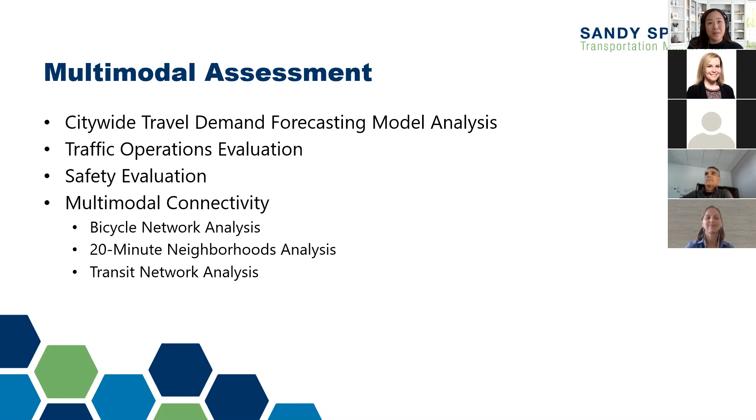I'm not going to give too many details and spoilers here since Jordan's going to walk you through some of that. So with that, Jordan, I'm going to pass the baton off to you. Could you share a little bit more about what we did? Sure. Next slide, please.

The first effort we are going to discuss from the multimodal analysis was our travel demand forecasting model, which is basically a tool that we use to better understand existing travel patterns in the city and how those patterns, and subsequently how traffic volumes, are likely to change in the future. That's based on a variety of things, including socioeconomic data and infrastructure projects.

For example, if we have a new roadway project or even a roadway widening type of project, if there are areas of the city where we anticipate a lot more jobs going in or areas where we anticipate a lot more housing going in, then all of those things influence where trips in Sandy Springs begin and end and how motorists or travelers route between those origins and destinations.

Then using that calibrated 2018 model that's refined to the city, we built a 2050 model. It keeps all of our calibration edits, and then it applies all of those planned roadway infrastructure projects that are planned for the future, as well as socioeconomic data projections from the region.

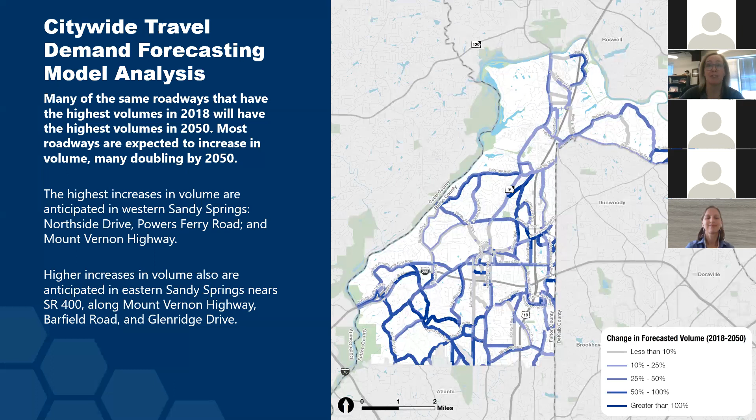And then there are areas of Eastern Sandy Springs with the highest increases in traffic volumes being those areas around State Road 400. That includes Mount Vernon Highway, Barfield Road, and Glenridge Drive. Next slide, please.

Looking at volumes from the model alone isn't a totally fair way to analyze traffic along the roadway network, since several roadways are higher volume because they're designed to carry more traffic volumes. That's why we look at volume to capacity ratio. We can get an idea of traffic congestion and quality of service by comparing a roadway's actual traffic volume to the volume to which it was designed to carry.

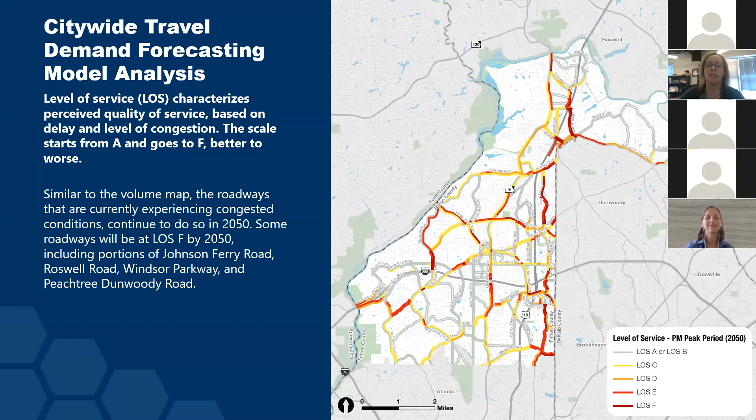But also related to the increased capacity on I-285, some areas of the city, like Hammond Drive, are seeing some improvements. Next slide, please.

Our next effort was our traffic operations evaluation. What's pretty common when doing a citywide transportation plan is it can be difficult to get very detailed and operational information for all of our city intersections, just because there's so many. So what we did as part of this effort was do a...

From here, we were able to do that type of analysis for 2018, and then we did it again for 2050 as well. We wanted to look at existing conditions as well as what's projected for the future, just to see what types of both short-term and long-term needs we need to address.

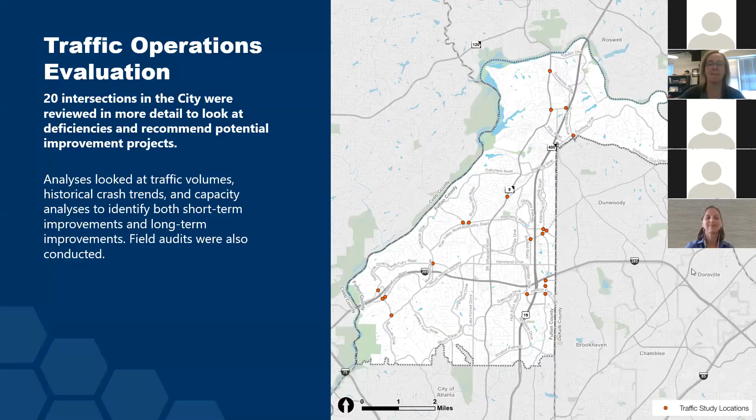Based on those needs identified at each of the intersections, we were able to make several improvement recommendations, such as repaving and restriping, improving signal equipment like adding backplates with retroreflective borders to signal heads, or upgrading left turn signal heads to flashing yellow arrows. We also identified other safety operational improvements, like raised pavement markers, retroreflective median nose delineators, those sorts of things.

We're in a position right now where the city has completed a lot of large roadway and intersection improvement projects pretty recently. So a lot of the recommendations that came out of this particular analysis can seem more modest in comparison, but really a lot of these are lower cost, lower effort projects that actually have a pretty high impact on traffic safety and operations.

This was a cool tool that allowed us to use the Transportation Master Plan as a way to address some more immediate needs for the city. So while some of the larger projects didn't come from this analysis, it was a really good effort to be able to jump in and look at some intersections in more detail.

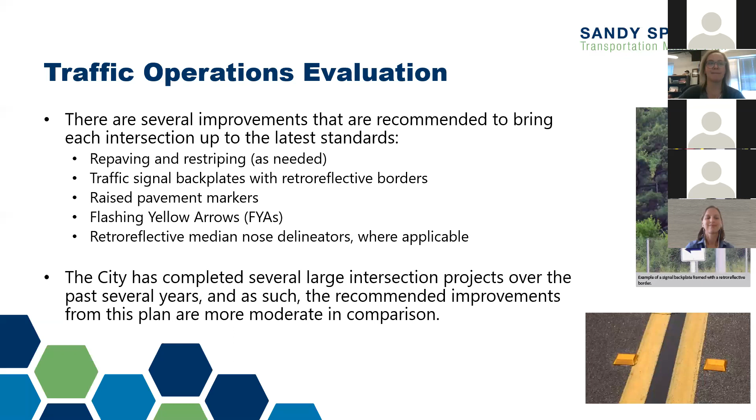Our next task was the safety evaluation, which Jessica mentioned before, was really two tasks. The first was looking at the city as a whole, but then, similar to our traffic operations evaluation, we also did more in-depth safety studies at five high crash intersections within the city.

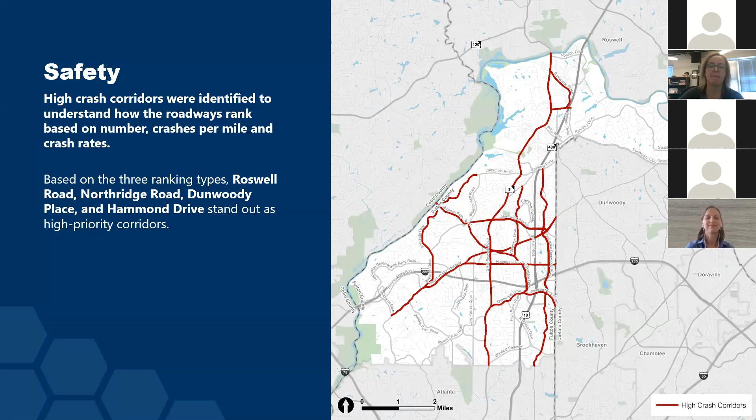Based on these three metrics, we identified Roswell Road, Northridge Road, Dunwoody Place, and Hammond Drive as high need corridors.

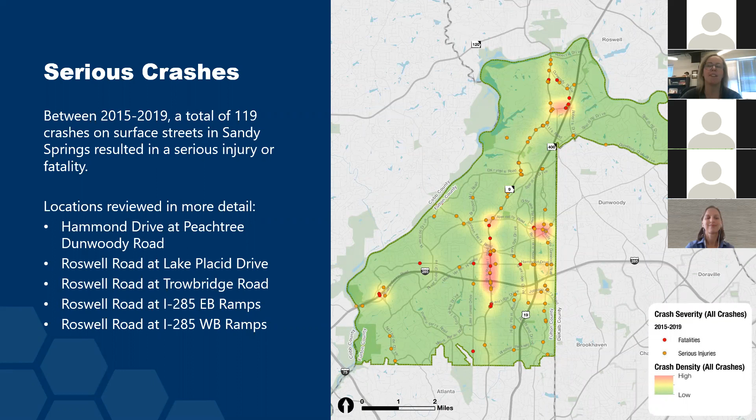As part of our citywide safety evaluation, we analyzed the city's crash history to identify emphasis areas defined from the state of Georgia's Strategic Highway Safety Plan. An emphasis area is a way that helps us identify the top factors contributing to crashes in Georgia. This allows us to develop countermeasures and comprehensive safety recommendations with corresponding programs to achieve crash reductions for the types of crashes actually happening in our community.

Identifying these emphasis areas allows us to focus our efforts on emerging safety trends and identify what's appropriate to treat them. So the top 5 emphasis areas that emerged from our analysis, listed in order for Sandy Springs, are intersection-related crashes, distracted driving.

Our next slide dives a little bit into bicycling and walking. For the bicycling and walking assessment, we looked at the existing city transportation network and tried to understand where there were gaps in the network. Another part of this analysis was to really look at the suitability of Sandy Springs streets for cyclists and pedestrians.

As part of this analysis, a cool tool we really tried to use was the level of traffic stress analysis, what we're calling LTS here. This was conducted to identify where streets would be comfortable for most types of cyclists. The LTS analysis includes considerations like traffic volumes, the number of travel lanes, and speed limits.

The categories range from LTS 1, suggesting streets are suitable for all types of users, ages, and abilities, to LTS 4, suggesting streets are only comfortable for the most experienced and confident riders. Streets classified as LTS 1 typically have lower traffic volumes, lower speed limits, and fewer travel lanes, while the opposite is true for LTS 4—so you're seeing a lot of major roadways in that red color.

One of the critical takeaways from this analysis was that there are a lot of roadway facilities out there, but a lot of the city's primary and secondary street networks are really only suitable for the most experienced and confident riders. So what does that mean?

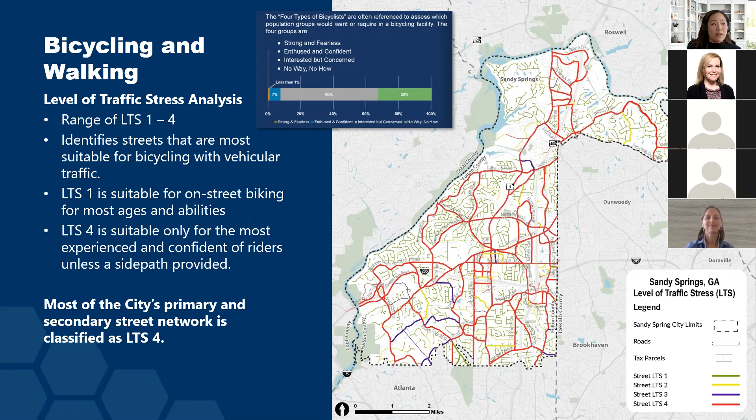Complementary to the LTS, the level of traffic stress analysis, we also conducted something called a 20-minute neighborhood analysis. The idea of a 20-minute neighborhood is to look at how we can give everybody, within a 20-minute walk or transit trip, the ability to meet their everyday needs.

This concept has a lot of positive features baked into it, such as more physical activity, more focus on connections to local businesses and resources, and potentially less congestion on our roadways, because people will be looking to use walking and biking for shorter trips instead of getting in their vehicle.

Our technical analysis looked at how far someone can walk from each of these activity centers within a 20-minute distance, which for most folks is about a mile. This helped us identify specific gaps in the sidewalk infrastructure, as well as major roadways that needed a closer look for bicycle and pedestrian infrastructure.

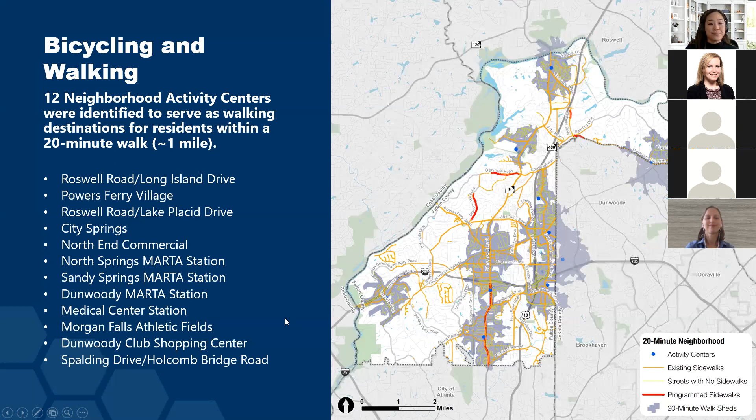We also conducted a transit network analysis as part of the TMP. Understanding that the City of Sandy Springs is not a transit operator, we focused on three specific aspects: first, how can we better those last mile connections to transit stops and stations; second, what does local circulation for public transit look like in Sandy Springs, and are there areas we can improve; and third, what are some of the travel needs between Sandy Springs and adjacent jurisdictions?

When we dug into the data a little deeper, we found each MARTA rail station has different shares of people driving versus using other modes. At North Springs, for example, 37% of folks accessing the station are driving, and that number decreases a lot as we go southbound. At Sandy Springs, Dunwoody, or Medical Center stations, that number drops to less than 10% of folks accessing those stations who are driving.

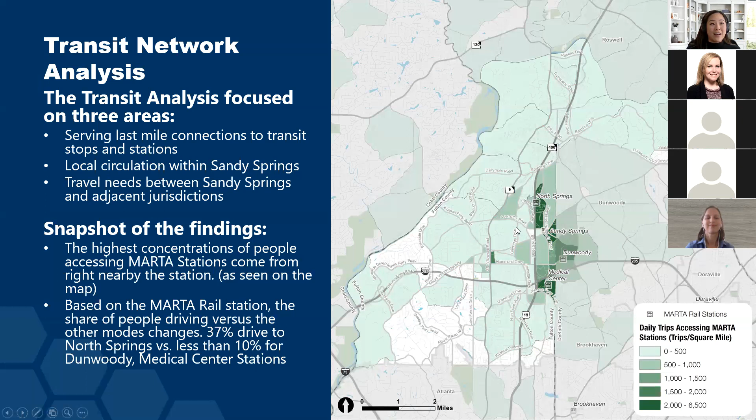When we think about the transit network, again, the city is not an operator of transit. So we really want to think about two specific things. First, how do we prepare for the regional transit discussion?

Some of y'all may know there are a lot of previous plans driving some of this conversation. As part of the TMP, we've identified ways the city can prepare for these opportunities, such as bettering connections to new transit opportunities, as well as continuing its participation in a lot of the regional transit discussions.

One of the ways the city can do that is installing what's called transit signal priority, or TSP, which is essentially a modification of the traffic signal system in order to allow transit vehicles priority travel and reduce overall delay of the buses at intersections.

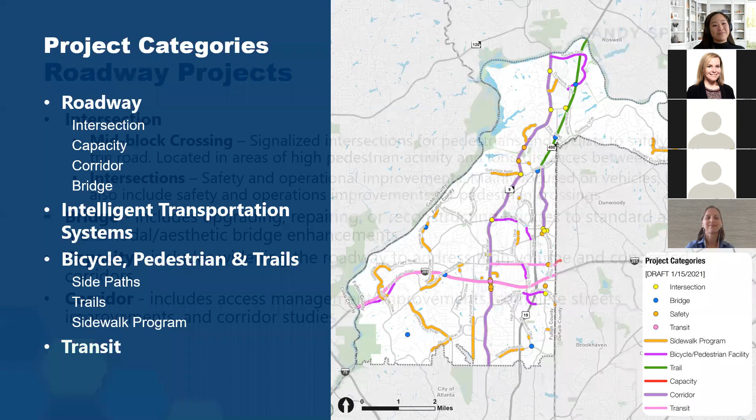The first major category is roadway projects. We have 4 big categories: intersection, bridge, capacity, and corridor. For the intersection projects, there are 2 specific types.

First is a mid-block crossing. Essentially it's a way for pedestrians and cyclists to cross safely at specific intersections. These are typically located in areas where there's a lot of walking and biking happening, or there's long distances between signals, making sure we're giving folks a great opportunity to cross the street safely.

There's also just intersection projects in general. These are safety and operational improvements, mostly focused on vehicular access. But again, anytime we look at a vehicular intersection improvement, we're also looking at ways to improve pedestrian crossings.

The second category is bridge. These are any of the bridge projects that need upgrading, repair, or reconstruction within the next couple of years. There are also some multimodal and aesthetic enhancements that we've included as part of the draft list.

The third bullet here is capacity projects, which includes widening of the roadway to address high volume and congested corridors. The fourth project type is corridor—non-capacity projects, which include mostly access management improvements, complete streets improvements, things like adding more bike-ped access, as well as some additional corridor studies.

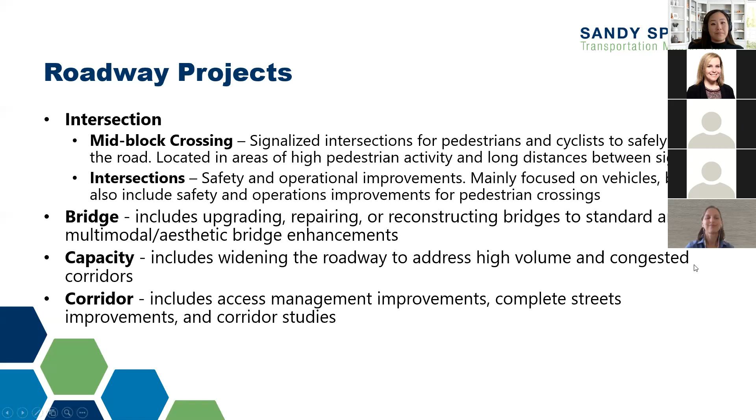You'll see that being treated a little bit differently, but on the online feedback tool itself, you'll be able to see the different types of sidewalks that are up for consideration.

These projects are not mapped on the online feedback tool, but if you'd like to give us some additional feedback, there is an opportunity to do that. I'll explain in just a little bit.

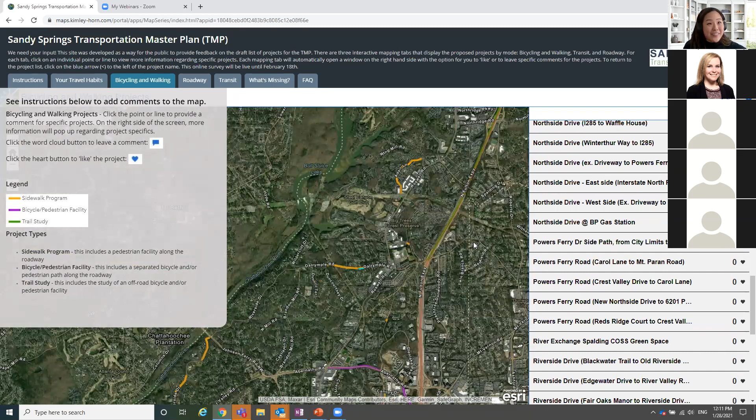For the roadway projects, it's very similar to how the bicycling and walking projects are set up. Again, a pop-up window comes up. On the left, it tells you how to proceed to give us feedback and how to click on the lines or points for projects. There's also a list of the specific projects up for your feedback, and a project legend that tells you what the colors represent.

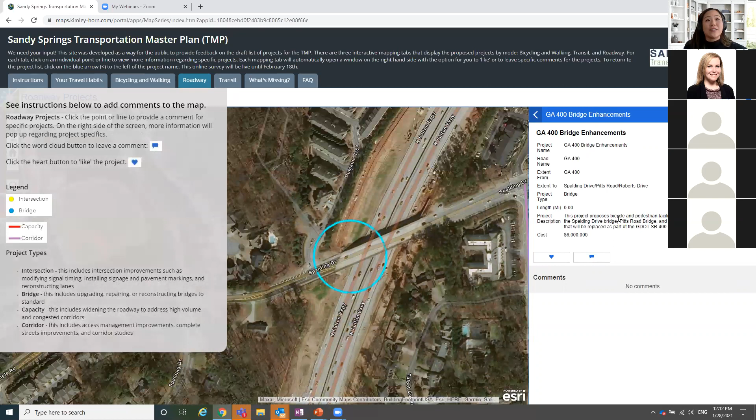I'll quickly click something here—I clicked on this intersection, and there's some bridge enhancements we're looking at. It tells you what the project is, what the cost is, and then there's an ability for you to like the project and give specific comments if you wish.

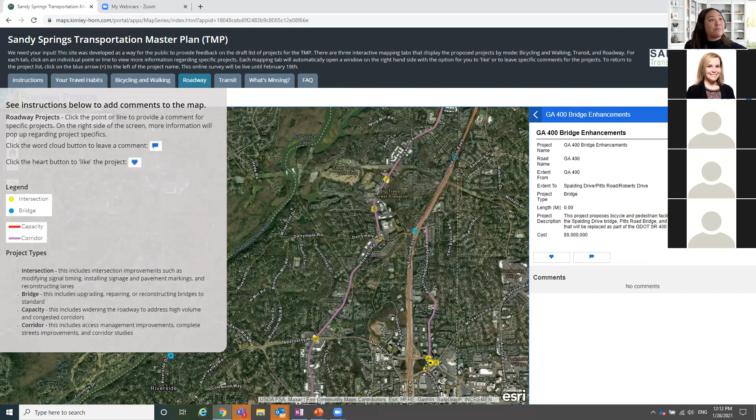The third tab here is transit projects. There are a little bit fewer transit projects for you to take a look at, but it's the same concept: click on the project, and you can either heart it or let us know your thoughts with additional comments. This blue arrow, if you click on a specific project and then click it to go back, will take you to the full list of projects for your master view.

The next tab is the What's Missing tab. Here we want you to add any final thoughts, comments, or concerns in the text box below. You can type your concerns and click submit. This would be a great place if you think we've missed a project, or if you're seeing something you'd like us to note. This will be recorded as part of our public feedback, so just let us know any other things we may have missed.

The last tab here is the FAQ tab. We have a couple of questions we thought may arise as part of this public feedback tool, like how will my comments and responses be used, and when will these recommended projects be constructed. The hint is that the projects are not funded yet and do not have a construction timeline. There's also a question about T-SPLOST and CIP projects. For any details or questions beyond what's shown here, please email us at tmp@sandyspringsga.gov and let us know your specific question, and we'll get back to you.